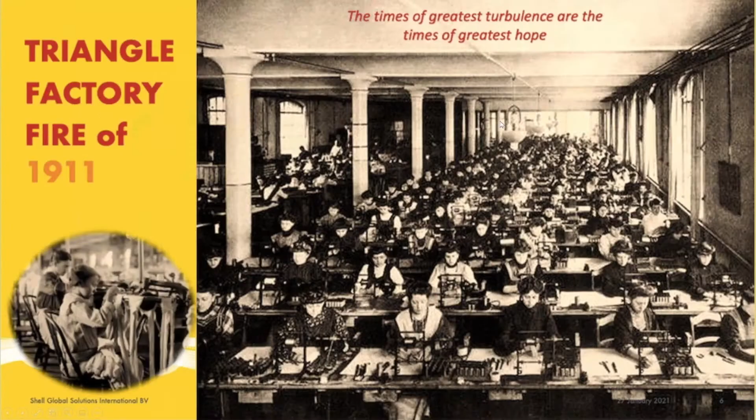Let me just see if I have trouble with this. Okay, so this picture, this was the Triangle Factory in New York in the Garment District. There's a lot to this slide for people interested in industrial safety and the start of the industrial safety movement. It was a sunny day, Saturday, March 25th, 1911.

Out of this tragedy came so much political reform that there were 36 separate laws and statutes in New York City that came out of it. And it actually started the American Society for Safety Engineers, which is still in existence today.

And that was the first safety society for protecting workers in industry.

I can go on a lot about this, but I'd suggest you really look into it. 146 people died, the majority immigrant women, young women. I put that picture there because that's where they worked - as young as 8 years old, with an average age of 16 to 17. They made about $15 a week, and had to pay for any needles they broke or material they bled on from cuts on the sewing machines. They moved from pedal machines that produced 36 stitches a minute to electric machines doing 300, but never trained the workers, so there were tons of injuries. It was basically one of the first sweatshops.

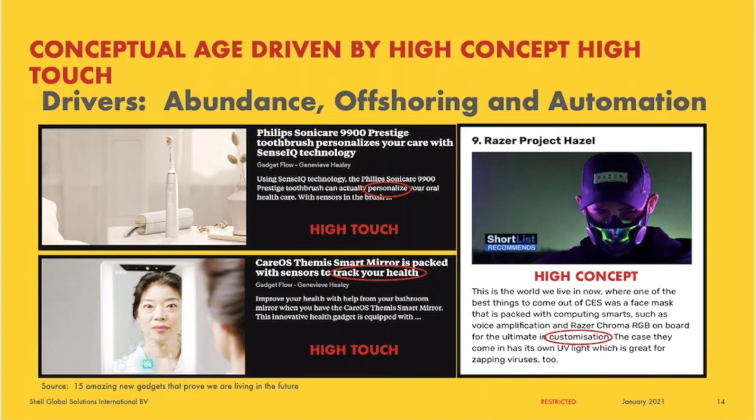I went to go buy a solar light for my walkway in my house. Well, it wasn't just a solar light, it did about 10 different things. This is what we're getting into, because people want things personalized. They want something that's going to work for them.

Again, I won't spend too much time on this slide, but this area, this Shell worker, this person, by research standards, is very impatient, very much overwhelmed, and very distracted. In the solutions, they want to be untethered, collaborative, all those kinds of things.

And so when we have these Industry 4.0 capabilities, cyber-physical connectivity, right? I can take a tag, a sensor, I can take all kinds of data, I can marry it with technology, with wearables, all those things.

But then they have conceptual age expectations. So one of the things I've seen in Shell is at some point we're really doing great with the technology, but we're not adding the human element to it. We're not humanizing it. So we're putting AR, VR, and other things out there that are really cool, but sometimes they don't get picked up and used.

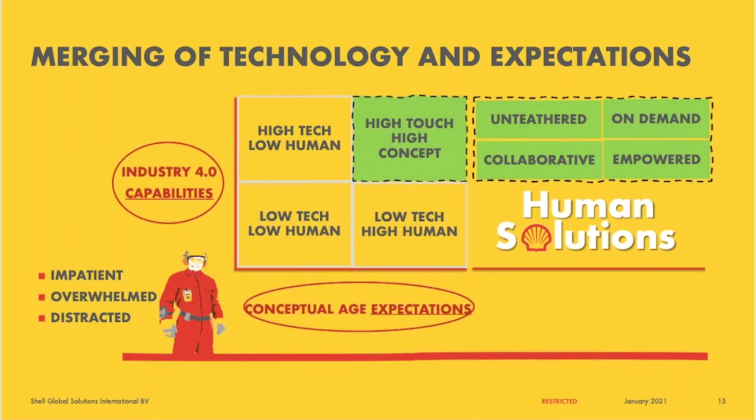I always use the example of the iPad for digital procedures that wasn't getting used because we didn't put a strap on it and people didn't want to carry it in their hand. So we've got to think about the end user expectations, and these expectations are high touch, high concept. They want one piece of equipment, one device that'll basically do everything. They don't want 5 different software platforms or things like that. So it's the human solutions we want, not just the IT solutions.

Busy slide, I won't spend a lot of time on it. What this is just showing you is in Shell, we look at the connected human performer on 3 dimensions. There's the external environment, which is cyber-physically capable, so data exchange on assets, equipment, and systems, all these things flying around, drones and tags and things.

And then we've got the individual level of someone saying, well, where am I getting all this data? How is it coming to me? Is it easy? Is it motivating me? And then we've got the things that individual is trying to do.

When I look at work, it's very simple to me. I look at things in Shell for learning and digital and all these things. Does it help me execute a task? Does it help me make a decision? Does it help me solve a problem? Does it help me escalate or document? That's what I want to be able to do, and troubleshooting things are in there like that.

So we're putting all these things in place: AR, VR solutions, procedural solutions.

But the one I clicked on here in red is the one I personally think is so cool, because I think it's not only smart, but it's our future. It's called Shell Do It Yourself. This is an app-based program where operators can see a problem they have in their everyday life, and they can build an app themselves with this software. This thing's gone over like a fireball. I've already got a spreadsheet of, I think, like 100 and some apps that these operators have built. And then when these apps go viral, they go to a kind of high-level publishing part of the company where they really make them professional.

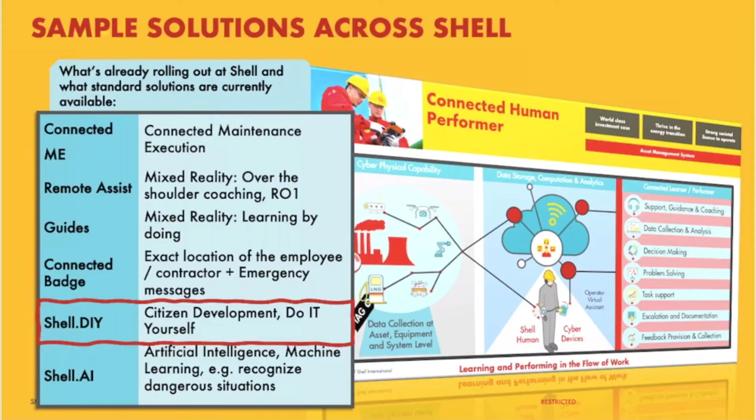This is what will distinguish and make people consistently credible and relevant in their organizations. So I'm really happy about that.

So we're going to look at Industry 4.0, and I'm not going to go over that very long because you all should know about that by now.

I'll talk a little bit about 5.0. And 5.0 is this reconciliation between person and machine. It's on the horizon and it's coming.

I did a lot of talking the last couple of years on this slide. These ages of mass movement through the mechanical era, or mass production through electricity in the assembly line, through mass information through the digital age of computers, and then now the smart production of mass connectivity. All this has been driven by technology, automation, and data exchange. But Industry 4.0 started in 2011. Now, each industry, it gets shorter and shorter in time between those industries.

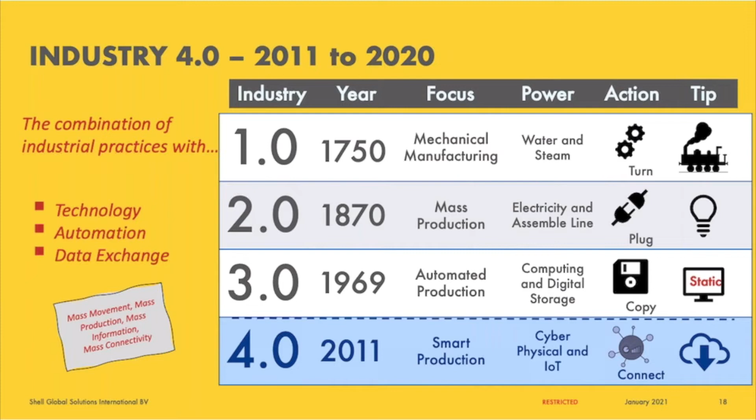Now, what you don't see on this slide is the word human. Industry 5.0 is about that cooperation between human intellect and these cognitive computing capabilities. It's about mass personalization, mass customization. It's about individualizing solutions to people, so they can set their preferences, make it work for them, and adjust and automate it. So that's really what we want to say about this whole idea of personalization.

That's why I showed you the slide about the smart mirror and the smart toothbrush and all those types of things. So this is going to present, and I think we've got a lot of learning folks on this call, a major reform point for corporate learning. This is what we've got to rethink.

A lot of people that know about learning in the 70s, 80s, 90s, etc., learning was often viewed as a managerial panacea for people problems. But what I don't want to have happen is, in the digital age we've been in, is digital to be another panacea for any kind of workplace problem.

So what we've got to do is be much smarter in saying, how do we go from these hierarchies—learning, digital, human factors, process automation—to something more matrixed, where we need a totally integrated solution that takes into account all elements of performance? That's what I really want to get to in some of this stuff.

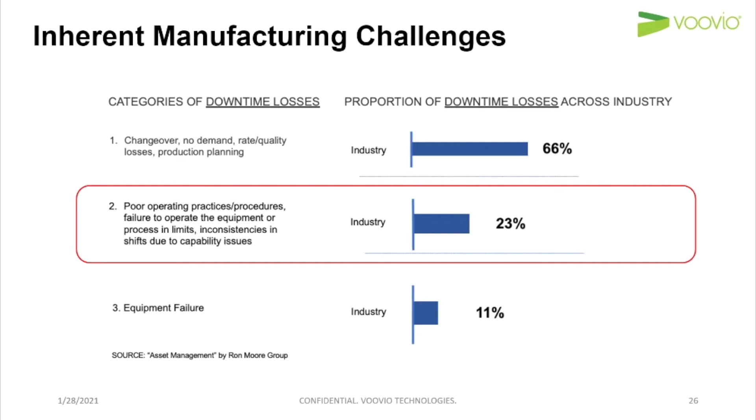So here's a quick view on some of the challenges we regularly hear from the industry and from our own customers. Unplanned downtime, OEE losses, incidents, whether they're environmental or safety. That happens frequently across the industry. But a big recurring theme is the loss of knowledge and expertise in the plants, with experts leaving or retiring. And now many process units rely on only a few SMEs, or subject matter experts, who have that critical knowledge to properly execute many procedures and tasks.

So there's a lot of experience walking out the door, and there's really no standard way to capture it. The ecosystem for knowledge capture and transfer and training is very people dependent. It is not system dependent. So, that's why this is a big opportunity for the industry.

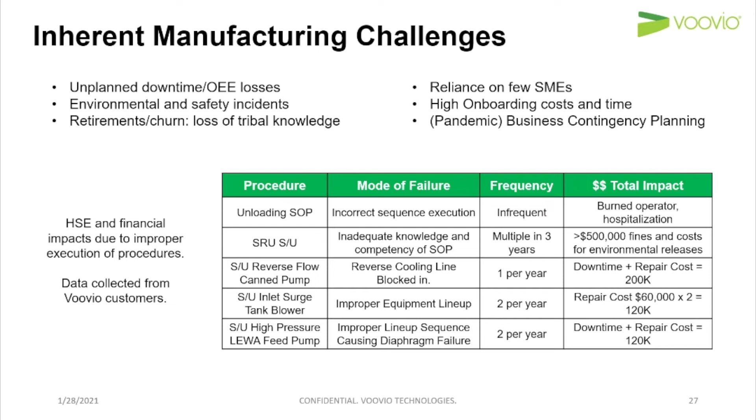So with that, I'm just going to switch to showing you how a cloud-based platform with digital replicas and simulators can actually solve some of these challenges. We'll look at some charts afterwards before opening it up to questions. Hopefully you can see my screen. Pat, if you can hear me, let me know if you cannot. Yes, I can see it.

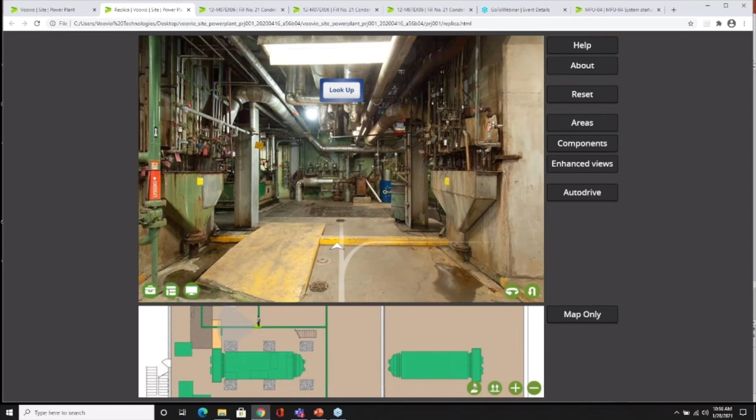So you're looking at a digital replica, and I'm accessing this from my home office, working remotely using a laptop. This is a utilities complex, and I'm walking through a series of images, photographs, which have been used to create a realistic, immersive representation of a process environment. So it is your real plant on the screen here, and you're able to walk around as if you were there. You can stop, you can look around in any location.

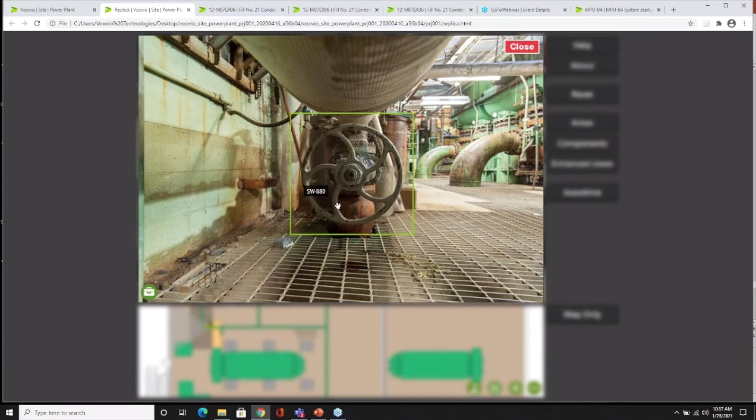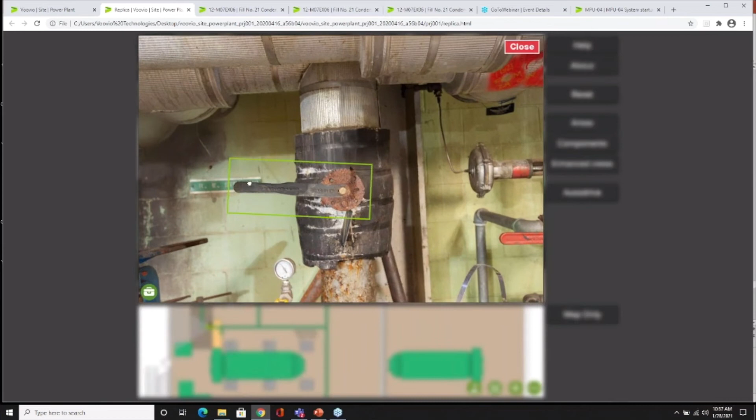You have the same degrees of freedom as if you were there in real life. And if you're walking around, you can also tag pieces of equipment. In this case you can see components like valves, gauges, instruments, but you can also tag larger items like pumps, vessels, and so forth. Whenever you click on one of them, you get a detailed view of that component with the label, and with your finger on a touch screen or a computer mouse, you can interact with that piece of equipment. In this case it's a wheel valve, but there are other types of equipment, control panels, bleeds, plugs, other types of valves you can interact with to practice procedures. We'll get into that in a second.

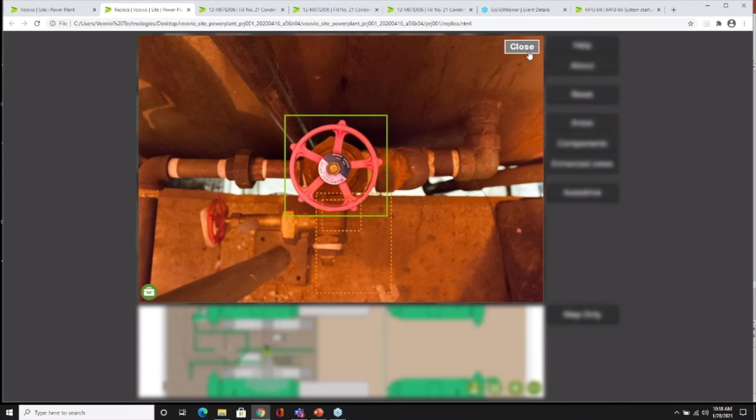Having this digital replica, which is always available 24/7, has some very powerful benefits, including the ability for operators and maintenance technicians to search for items or equipment, whether they're preparing to go into the field to find this valve, for example. You can click on it and it will take you straight to where that valve is located. Or you could use it as a collaborative training tool when you're not able to take people on site.

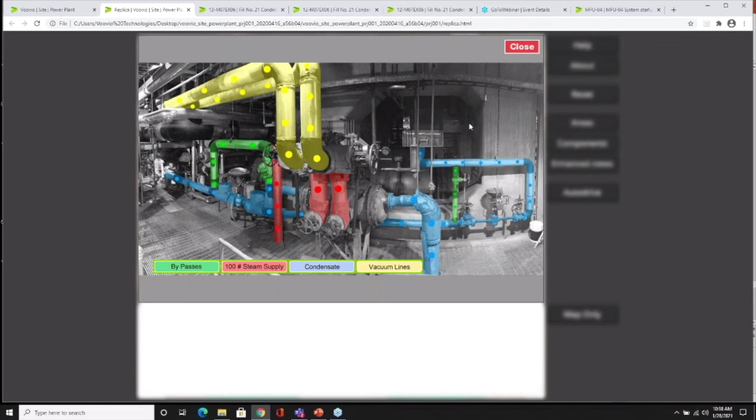Another thing that you can add into the replica are what we call enhanced views. So this is where you have a piece of equipment like this one, an air ejector, and you'll see the color-coded icons at the bottom labeled. If I click on them, you can activate the flows, turn those on and off, and it's an unambiguous view of that system. Very powerful for onboarding and refresher.

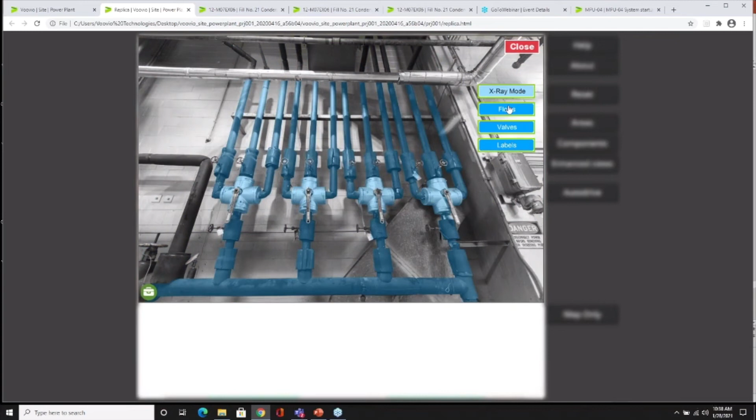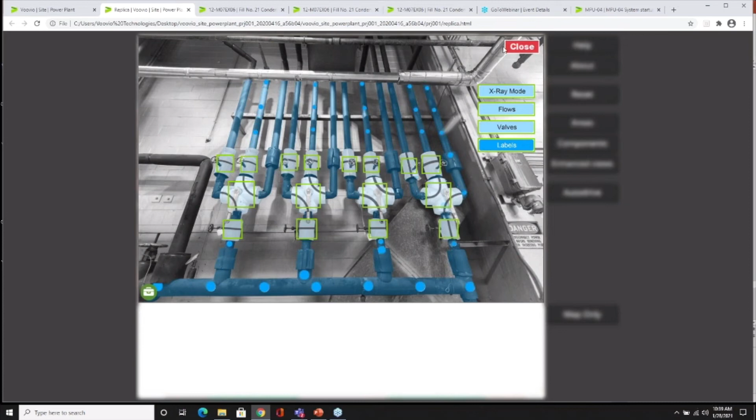Another really popular area to do this is complex manifolds, where when we activate the flows here, you'll see that the valves are highlighted in green boxes, and you'll see my mouse in the bottom right of the screen here on the bottom valve. I can open it, and the flow corresponds to the position of that valve. Very effective in terms of the onboarding and refresher tool, and you can access this 24/7 anywhere.

So what about the simulator? This is where you can practice procedures in your real plant, and this is a really good way to automate that knowledge capture from your experts and put it into this checklist replica format that you see on the screen.

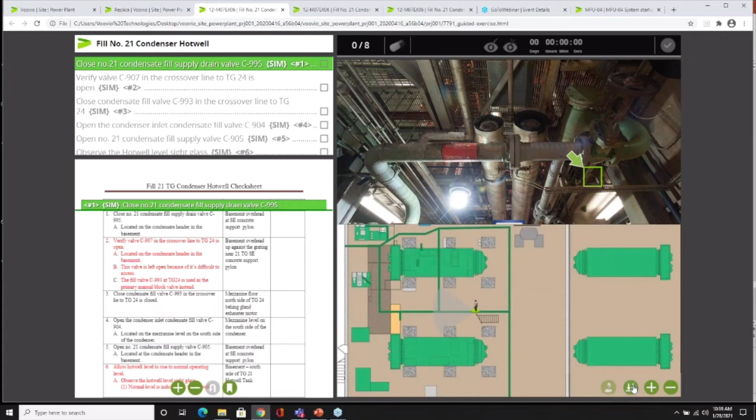On the screen, you have the replica on the right. You also have your map at the bottom, so you always know where you are. You have your procedure here on the left. This would be a procedure from your plant - Voovio does not create this. Above that, we have an action checklist.

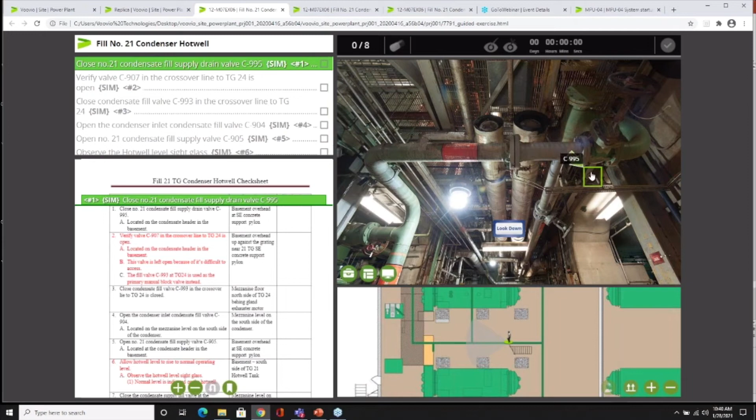The reason why there is this checklist in addition to the procedure is because in simulation, you're focusing on actions, and when you're in the field, you do one action at a time. So if your procedure says close all the drain valves, and there are 11 of them, we would have 11 items here in the checklist because you have to do them in a certain sequence, and you shouldn't forget one of them. So let me do the first couple of steps here. You physically have to interact with the equipment, with the valves, and then you confirm, and you go to the next step.

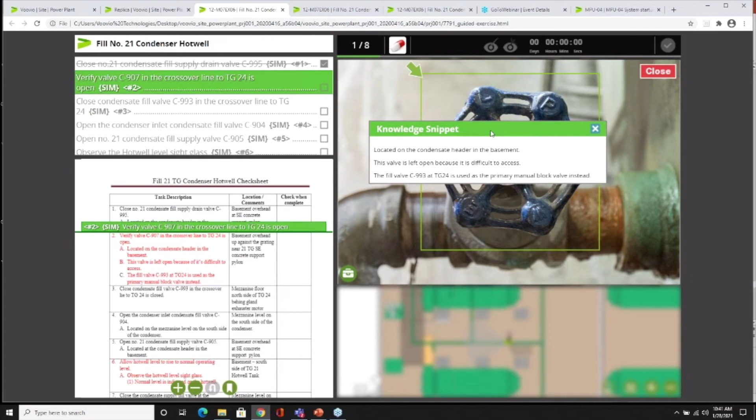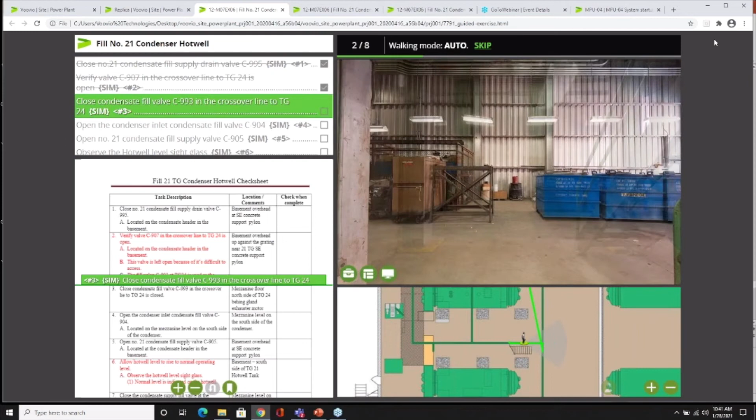In any step, when you have a digital tool like this, you can embed that tribal knowledge. You can capture and embed that knowledge from your experts in specific steps. For example, here is a piece of text on why this valve is always left open, but it could be a video, or something else explaining how you do something. It could be a caution or a note related to a previous incident. But those knowledge snippets are incredibly powerful knowledge transfer tools. So this simulator I'm using as an example is a guided one.

So the system actually walks you through the unit to the next step. It's like a virtual SME. We've had customers use this throughout the pandemic for training on tasks and procedures when they can't get into the field. So what about testing?

Within this environment, which I've just shown you, the replica, you can walk around freestyle and execute the step without any assistance, and you get real-time feedback on your performance. So what I'm going to do is do the first step correctly, and then on the second step I'll make a mistake.

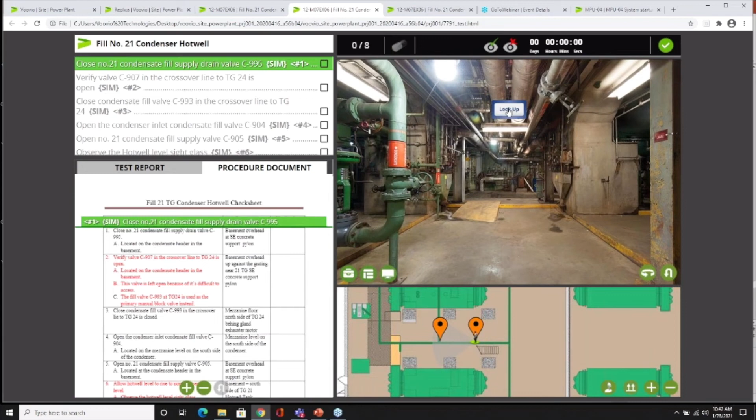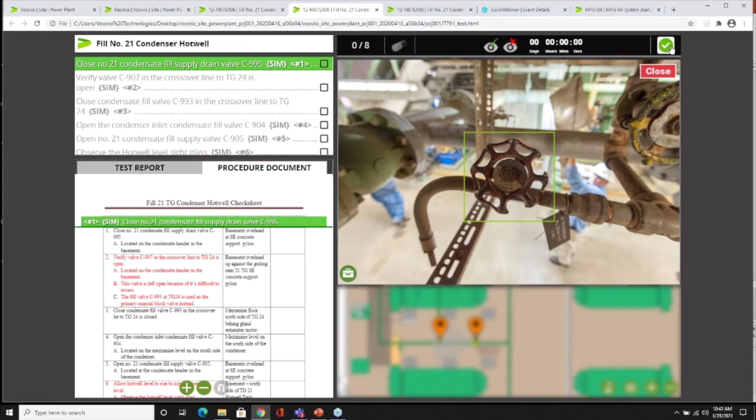If you remember here, I have to close this valve. So once I've physically had to interact with the equipment, I close it, I confirm. You'll see that I get immediate feedback, in real time, saying action completed correctly. So you have that real time feedback.

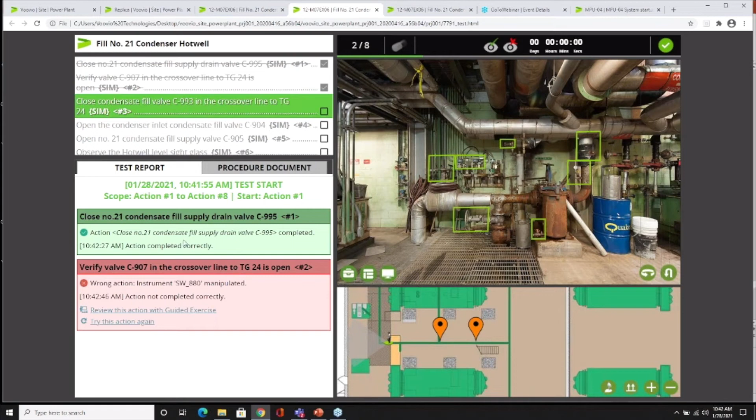So what if you make a mistake? If we go up here and I crack open this valve that we were at before, and confirm, you'll see we get immediate real-time feedback, and it even logs which valve I interacted with, which was the wrong one.

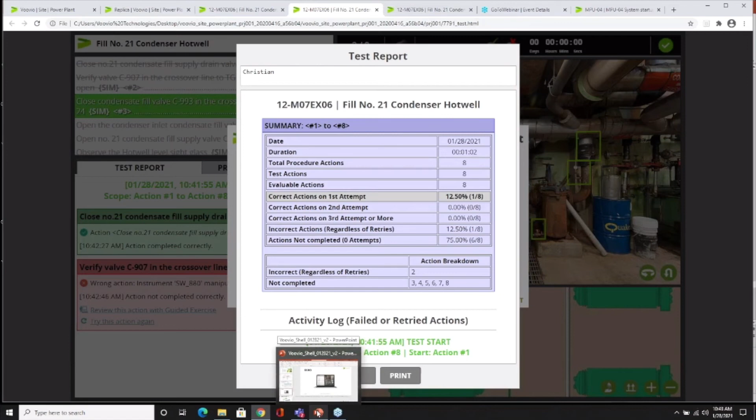So the output of this type of solution is that you have a documented way of testing people in a standard way on entire procedures, or even just sections of procedures, with a record of everything that they've done in the test. It's a great way to build that competency and then have a documented way of testing on it.

So I'm just going to show you a couple of charts just before we open it up to questions. This chart shows you how you solve those challenges that we covered earlier, like unplanned downtime. This chart shows the competency of operators on the y-axis and time on the x-axis.

So the lower curve, the blue one, reflects what we find in industry. The traditional methods of training and onboarding go through job orientation, reading procedures, and there's a period of time of job shadowing. With that, you often have overtime dedicated by the SME, with some type of field demonstration at the end and a written test to complete qualification.

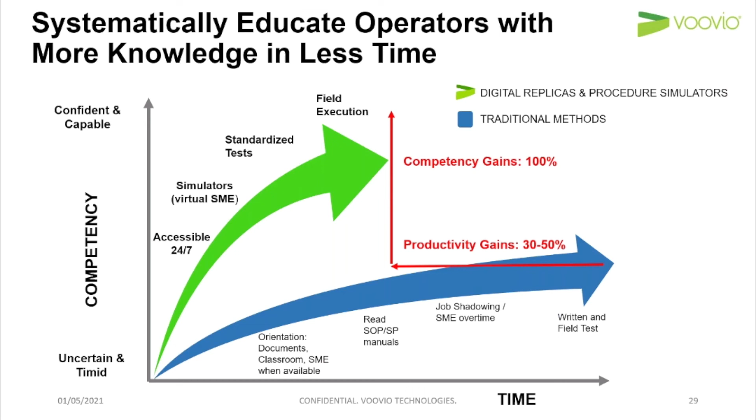With this type of simulation, you're able to find that operators can qualify in half the time, and the content they are learning is significantly greater. We hear that you can expose them to 10 times more knowledge and procedures than with traditional methods. The competency gains are more than double thanks to 24/7 access, independent of the SME's availability. And then you can demonstrate their capability using that standardized test I showed you, and also a field test.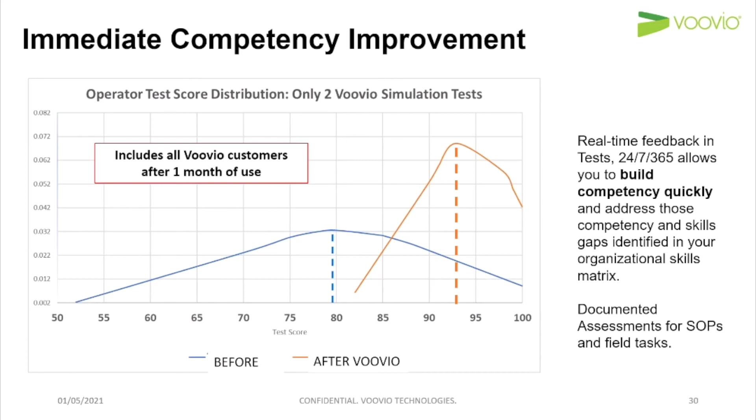So when we then ask those same operators to practice on the simulators and take another test, you'll see that the scores deviate much less, and the average score is actually closer to 93. So the ability of those operators to practice their SOPs in a standardized way on their own, 24/7, has huge benefits.

They can cut that time in half with the digital replica and simulators. Operators can pick up complex equipment and procedures much more quickly, and the overtime and SME time you reduce is significant. And that's a lot of money.

The reduction of unplanned events is also important. They found that they often have startup delays and have to bring in extra overtime. They've seen that every time they have loss of steam or loss of electricity, that's about $35,000 to $50,000 an hour, or a day. With Voovio, with the digital replica and the simulators, you can cut that to zero, those unnecessary delays.

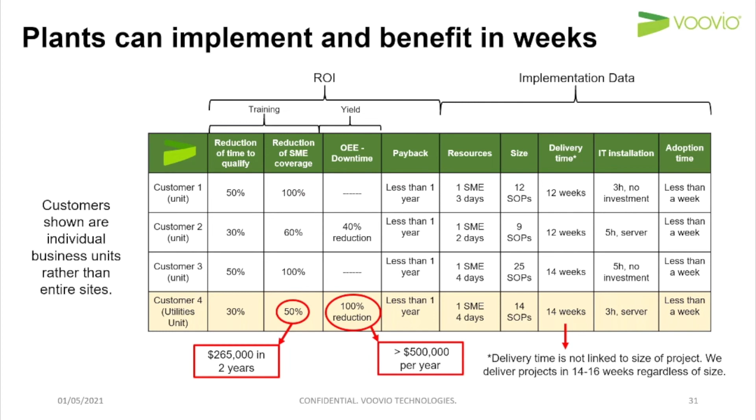So the point here is these types of targeted solutions can be implemented in a matter of weeks. It's a really effective way to automate that knowledge capture and transfer in your plant, to get that expertise from your SMEs to ensure it's not lost. And the industry really needs tools like this to remain competitive, especially in this challenging environment.